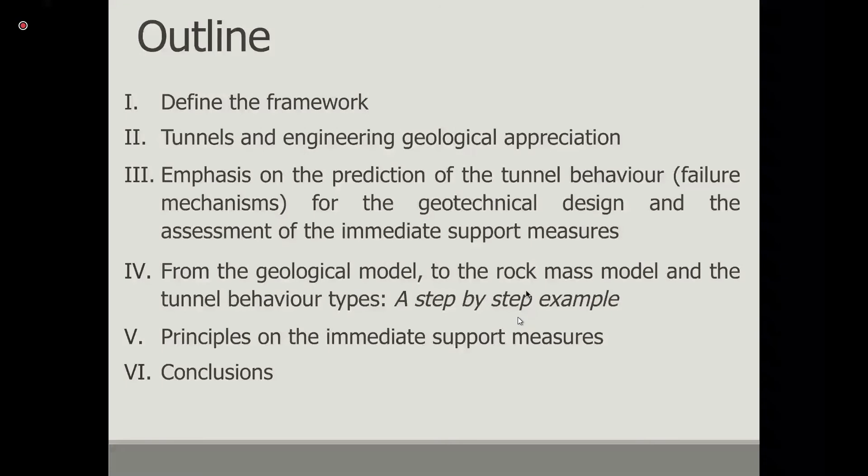So the framework of, in general, engineering geology, uncertainty, and tunnels would say that first of all we have to build a geological model, and the consideration to find all these particularities along the tunnel, all these geohazards that may come - either it is the lithotypes, or the tectonism, or the weathering, or the paleogeographic evolution - and all this should be constructed in an engineering geological model of the area.

So a lot of uncertainties may arise from that appreciation. In order to put that in the scale of your tunnel section, the identification of the ground mass types, either soil or rock, and specifying all the engineering geological characteristic keys that affect tunnel stability or instability. Then the assessment of the engineering geological behavior for every ground type when unsupported, before implementing any support categories, is another issue examined and analyzed here.

The selection and definition of the appropriate design parameters that the geotechnical engineer requires for his analysis is a particular assistance of the engineering geologist towards all these tunnel design efforts. And finally, the principles of excavation and immediate support measures based on these failure modes. I'm not talking about detailed support measures here, just the principles and types that the engineer should focus on in his analysis.

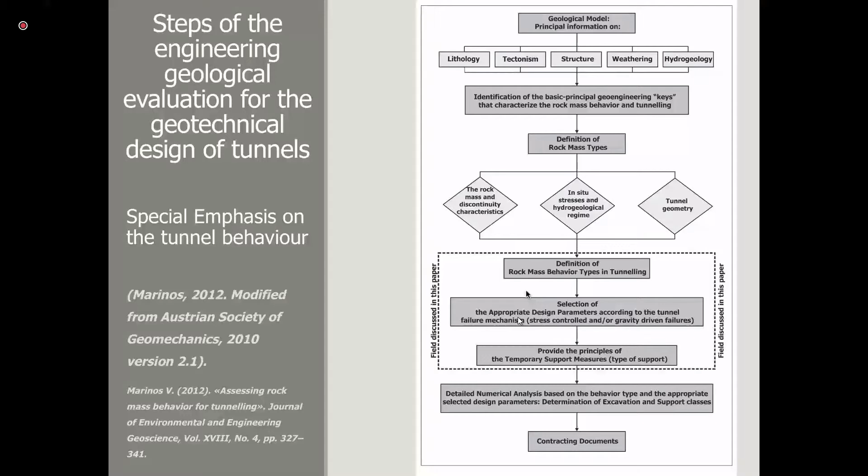But I have to emphasize here, what about the assessment of the tunnel behavior towards the geotechnical design? The simple question is how the ground works, and how this is implemented toward these steps. So I'd like to provide this flowchart to emphasize that the main link from the definition of the ground types to the selection of excavation and support categories is the definition of the rock mass or soil behavior types in tunneling. Let's see that in a bit more detail.

So from the geological model and the principal information from lithology, tectonism, structure, weathering, hydrogeology, any evolution that can affect the material's properties, whether intrinsic or structural, we have to identify the basic principal geoengineering keys that characterize the rock mass behavior in tunneling. Excuse me, I say rock mass behavior, but you can say ground behavior in general. My examples will just be given in ground types, in rock mass types - that's why I use rock mass types. But it's the same framework in general for soil types.

So we have to define the rock mass types along the tunnel, of course. And then, according to the rock mass and discontinuity characteristics, the in situ stresses, hydrogeological regime, and tunnel geometry, we can proceed to the definition of the rock mass behavior types in tunneling. And then we are on better ground in order to select the appropriate design parameters and give a more realistic analysis.

Either it's a stress-controlled or structurally controlled failure, then we provide the types of temporary support measures - the principles, not the detailed analysis that comes afterwards from the geotechnical engineering, but just the principles and types of support he should focus on in order to face that failure mode. And of course, then the contracting documents that follow.

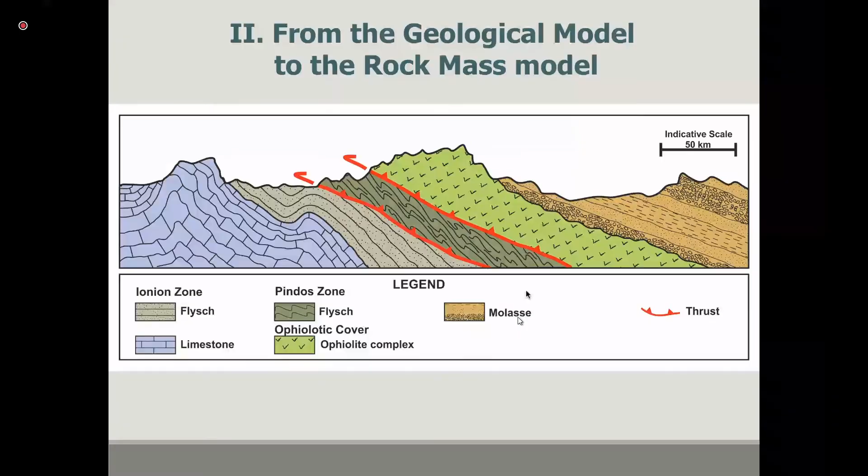So the first step is coming from all this. You can see the scale up there - we can never design at this large scale, but here we have to detect a point in our mountain and see what the structure is, if we have mixed conditions, what the tectonism is, what the weathering degree is, and all this. We try to put that in our mountain, in all the boundary conditions, and the in situ stresses or hydrogeological conditions we may have. So the definition of the rock mass types is the first step in this design.

This is, let's say, if we delay our design in tunneling to our final submission, what he may need during this time is he says, give me in a table the rock mass properties, the soil properties. Give me the section and the properties. This is the reality - this is what the geotechnical engineer wants.

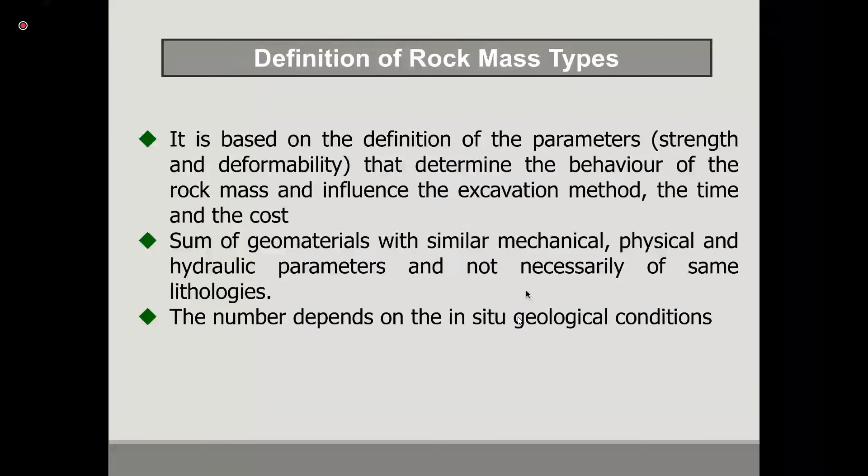Of course, this should not be the only information that we pass on to the geotechnical engineering. But let's categorize that first, and we will see how we can assist by not only providing this sum of properties. So the definition of rock mass types is a sum of geomaterials with similar mechanical, physical, and hydraulic parameters. The number of these depends on the in situ geological conditions.

And of course, to the excavation method also. Then we can group that we have to detect the properties of the intact rock and of the rock mass. So any strength and deformability parameters of the intact rock and of the rock mass are of higher importance. And the strength of the discontinuities and any other geometrical characteristics of the discontinuities are of great importance, depending on the behavior of the material.

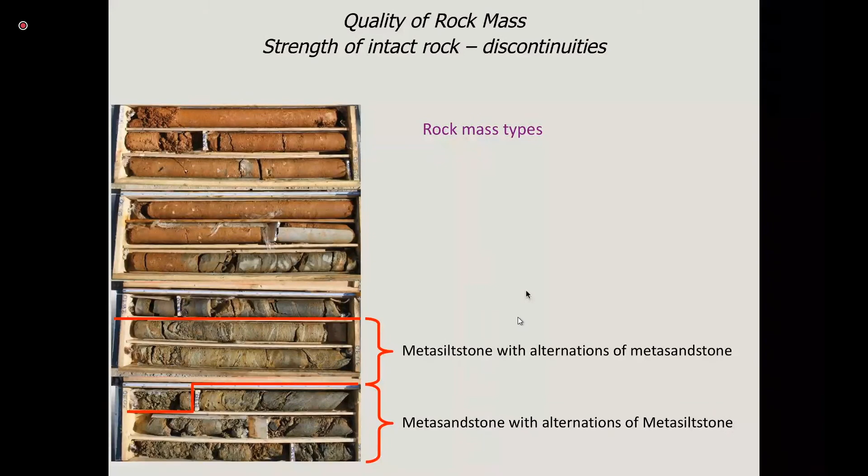Again, we have to distinguish which rock types we have, or which more particular units. So we can isolate meta-sandstone in one case, and alternations of meta-siltstone and meta-sandstone. Within these alternations, we see which one prevails or not. So we have to do this distinction in rock mass units, and then we can take different kinds of specimens or samples and try to test them.

And we have to use some common language between the geologists, engineering geologists, and the geotechnical engineers in order to describe these materials. And when this is a weak rock mass, here for example in alternations, this is a kind of flysch.

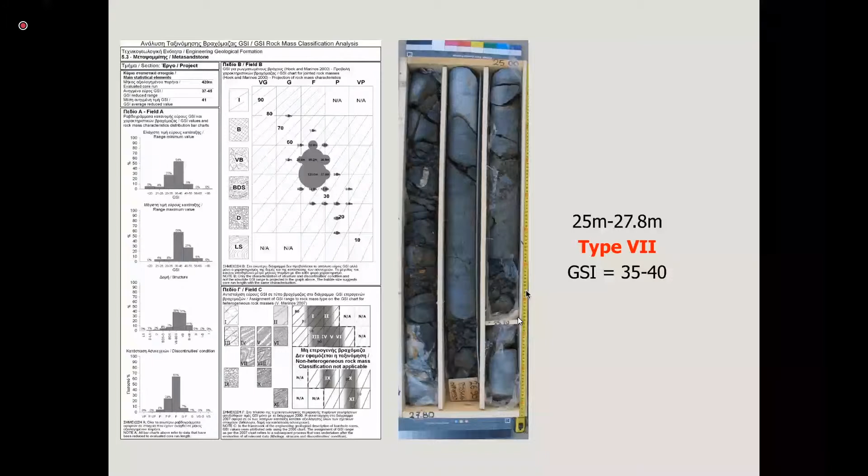They use the GSI for heterogeneous rock masses like flysch, and you see for hundreds of cores they do this kind of geotechnical classification. You see from the bubbles all these areas that you may have in your rock mass qualities. So here, immediately you can have a description of your rock mass, and you can quantify, put some numbers to the material, just to classify, just to characterize, in order to have a common language.

Together with the laboratory tests, if it's a uniaxial compressive strength, and information about the deformation modulus of the intact rock, also from point load tests, you can come up with correlations, and say that all laboratory and in situ tests correspond to one of the rock mass types and are evaluated according to their nature. And you can start translating this previous nice geological section into this.

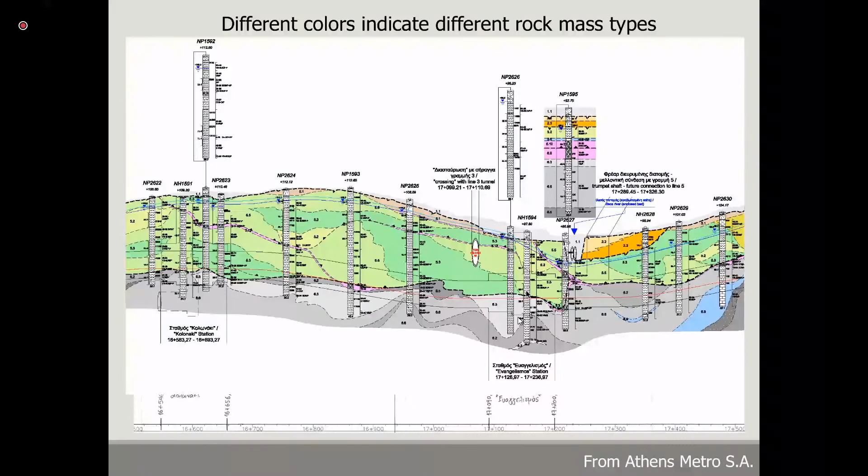And you can put some numbers to that, either it is a rock mass classification value or other properties of the intact rock. So this is an example of how you can identify rock mass types using the rock mass classification system and the laboratory tests. Another issue that we should be very, very careful about when identifying the rock mass types and then evaluating their behavior in tunneling is the scale.

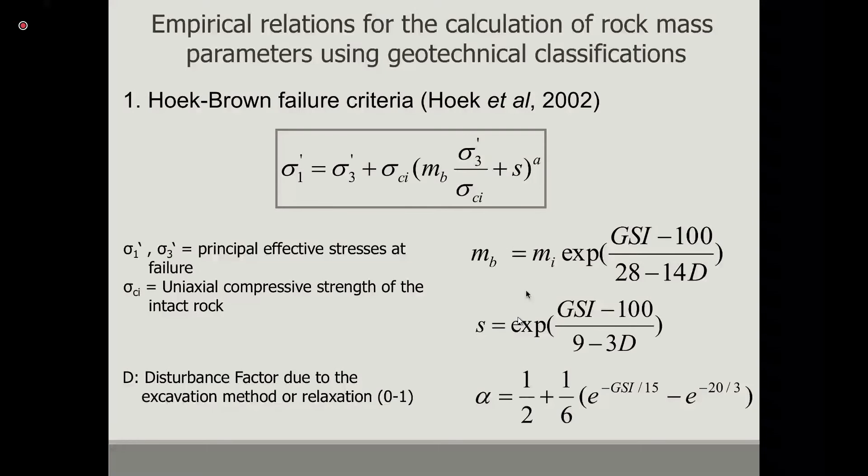Of course, again, I have to emphasize that this is for isotropic behavior. We know that as a very large description, isotropic and anisotropic behavior. So in this presentation, I want to highlight that, and not just depend on a rock mass classification system. But let's see that afterwards.

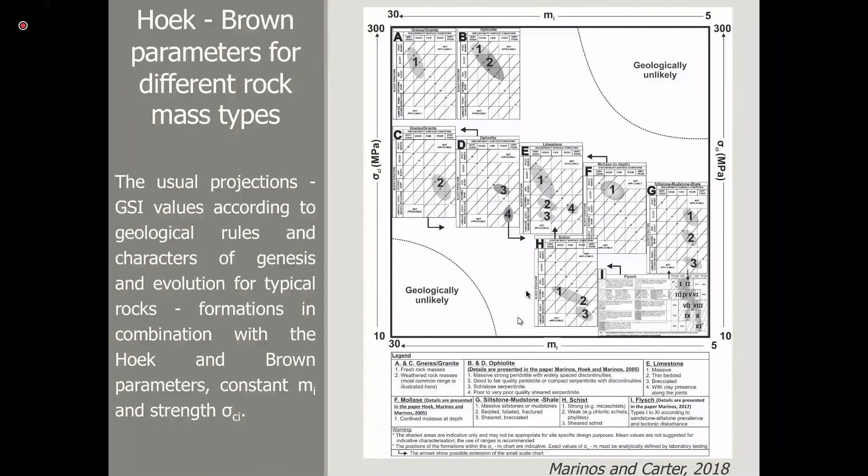So why select a property from a table from the literature for MI? You can see the ranges you may have, which can give you big ranges also in your results. So this is a very, very detailed job that should be done with triaxial tests for the calculation of MI, and for uniaxial compressive strength or point load for your materials, and of course the GSI that can come for the site-specific rock mass.

So in order to select a geotechnical classification system, you should be aware of the application ranges you have for when you use that.

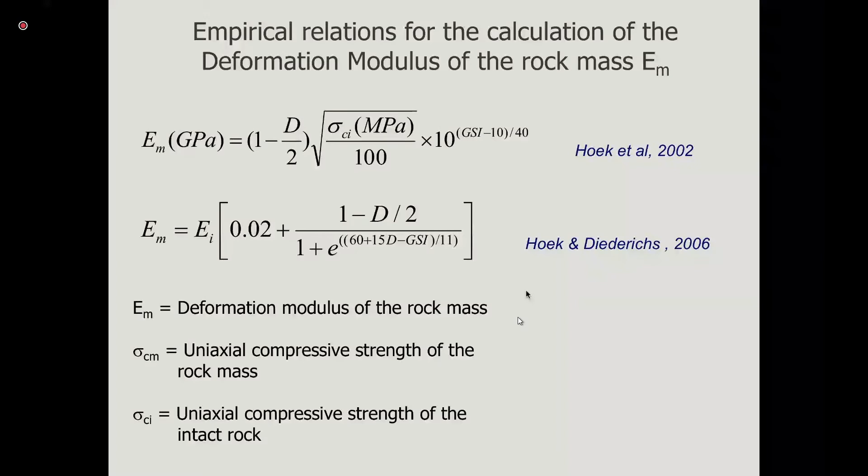Again, of course, other equations that you can use in order to calculate deformation modulus, because when you want numbers and you need to provide that for your rock mass, then you can use these correlations that may come from previous experience. And then again, it is your material—either it is the intact rock, like the deformation modulus of the intact rock, or the modulus ratio, or it is the uniaxial compressive strength of the intact rock, and of course the rock mass classification value.

So let's proceed to the main scope of this lecture: understanding the behavior in tunneling. And when I say understanding the behavior, I mean mainly the importance and how this should be incorporated in the geotechnical analysis. As Peter Vaughan said in his 34th Rankine lecture, the understanding of real behavior is more important than accurate calculation, and better prediction is only possible when reality is modeled.

And by Hoek and Londe in 1974, previously: the function of rock mechanics engineers is not to compute accurately, but to judge soundly. And when all your analysis is based on a more realistic modeling and the appreciation of how the ground works, then your job is founded on more sound ground.

So let me say here first, before proceeding, that of course we have different excavation methods, but here I will focus on the conventional tunneling methods, and that's where my examples are coming from. So I will focus on conventional tunneling, and here, let's say, 99% of our examples are coming from sequential excavation and top heading and bench method—not from full face excavation.

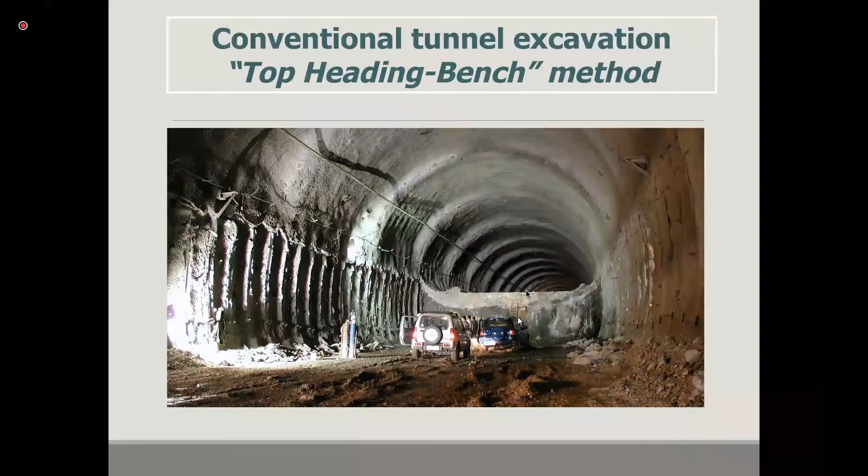And we're going to talk about all these measures we implement in such excavation methods, but it's not in the scope of this presentation to analyze that in detail, and I would say most of you know about all these. So when we decide what kind of measures we select, and the grade of the support we're going to use, and the type—again, this depends on the appreciation of the behavior before applying this.

I can show that by illustrating this example. Imagine you have two different rock mass types. The first, on your left, is a fractured rock mass with poor discontinuity surface conditions, let's say slickensided surfaces, under low tunnel cover. On the right, we have a brecciated rock mass with good discontinuity surface conditions, like rough surfaces, again under low tunnel cover.

So we have the same kind of material, let's say limestone, and the same in situ stress regime. When we use the GSI system and the observational chart, and it's the same if you use the quantified chart, we will see that the first rock on your left will be projected here in the diagonal of 40, by blocky and poor combination. On the right side, it will also be projected in the diagonal value of 40, though it is a very poor disintegrated rock mass with good rough surfaces.

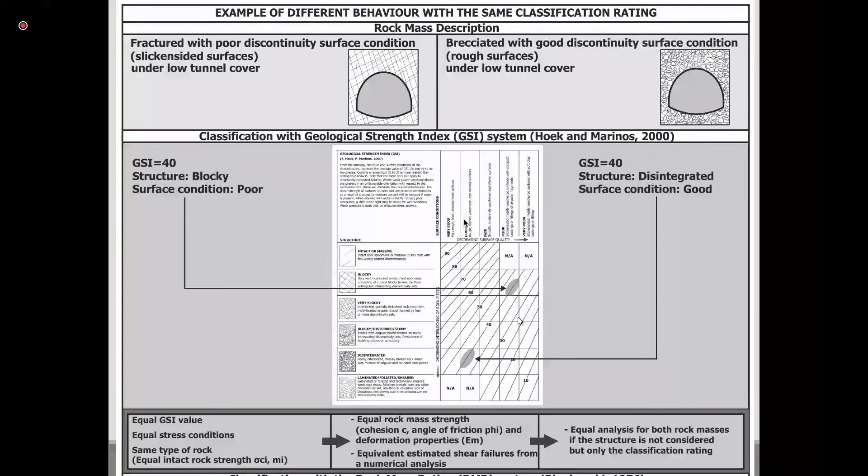If you go and calculate your properties by the Hoek and Brown failure criteria, you will find equal rock mass strength, cohesion and angle of friction, deformation properties, and equivalent estimated shear failures from a numerical analysis. So you will have equal analysis for both rock masses if the structure is not considered, only the classification rating. And if you do that for the RMR system, again, you will find yourself in the same support category, like here 3, for example. So you will get equal suggestions for support measures.

But the actual tunnel failure mechanism and appropriate support measures are totally different. On the left side, we will have wedge failure and block failure along the slickensided surfaces, and this will probably happen very fast because you have low friction along that. So you're thinking about a specific kind of supporting, like anchors, Swellex or Split Sets, in order to immediately support and confine these blocks that you can analyze in your tunnel design.

On the right side, you may have flowing ground or raveling ground, depending on groundwater presence. Here you probably need pre-support by light forepoling umbrella-like spiles, or a very small excavation step if you don't want to do that. You can see different kinds of appreciation in your support measures. And all these here are, of course, not detailed suggestions of support measures. Of course this experience comes from many tunnels, but I wanted to highlight the type of support and the philosophy after identifying the failure mechanism.

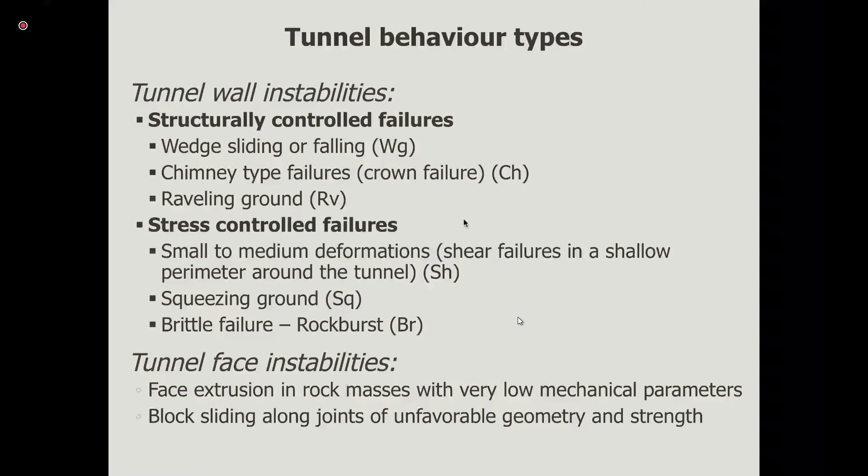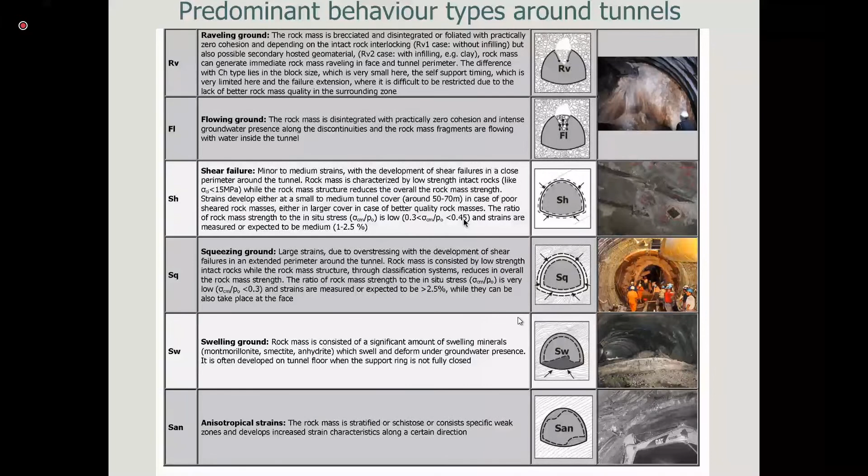I'm not going to stay here and make a theoretical example of that, but I will show some examples later in different rock masses - again, raveling, flowing ground, and then going to the shear failures around the perimeter, and of course some particular behaviors like swelling or some anisotropical strains around the tunnel. Again, I have to emphasize that these are some examples, some classification of the failure modes. In your site-specific tunnel, you should identify your failure modes in correlation with other examples in the literature.

So some pictures from raveling ground or wedge falling and sliding, and chimney type failure, and you see here in the material that has over-excavated and fallen. In this particular case, this is a completely weathered gneiss in depth along a fault zone, and of course the squeezing ground and overstressed steel sets.

You can see here how all these are yielded, and the very famous picture on the right side - you can see in a hydraulic tunnel how this has squeezed. And a first approach in order to say, let's say, when we start to have these stress control failures, is this chart coming from Hoek and Marinos 2000.

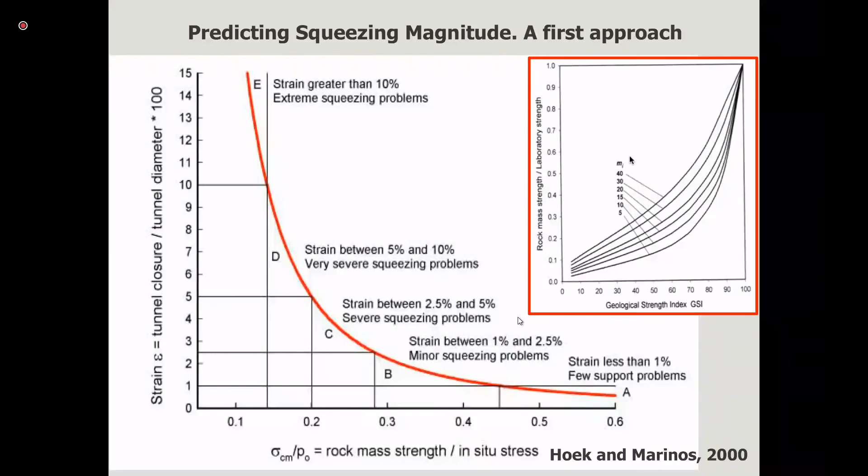From many cases, the appreciation and evaluation of the rock mass strength and the in situ stresses can give you the severity of squeezing. Different cases from around the globe, and all this monitoring coming from tunnels, gave us this chart. So we can have the calculation, a first approach. This is not a detail, just to say that in this section of our tunnel, we may face this kind of severity in our stress control problems.

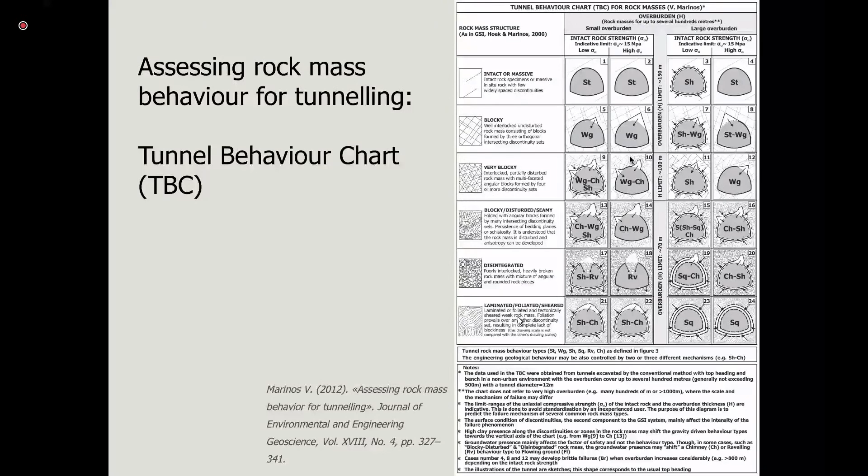From 62 tunnels, this experience coming from the design of 62 twin tunnels, I have to emphasize, we have the prediction of the tunnel behavior.

By identifying, let's say, parameters, the first one is the structure, and these are nice blocks, nice sketches from the well-known GSI chart. Then two sets of columns: small overburden on your left and large overburden on the right, and low uniaxial compressive strength on the left and high uniaxial compressive strength on the right. And the limits come low, high.

It is depicted here, and you can see that we are shifting either from a non-stress control problem to a stress control problem, which has to do with this ratio of the uniaxial compressive strength of the rock mass to the in situ stresses. So the combination of the GSI, the uniaxial compressive strength of the intact rock, and of course the overburden, can shift you from a non-stress control problem to a stress control problem. That's why you may see a wedge problem on the left, but then becoming a shear problem on your right, shear stresses control problems around your tunnel.

Another boundary for the gravity-driven problems has to do with the situation of confinement. When we are at depth, we have some confinement, so maybe some crown failures, or some raveling ground close to the surface where we don't have a lot of confinement, we may not have it at depth. When we get raveling ground, as in situation 18, we may not have that at depth after, let's say, 70 meters, and we may have chimney type failures. And of course, we may have some initiation of stress control failures. I'm not going to say more on this chart because we're going to use it in our examples later.

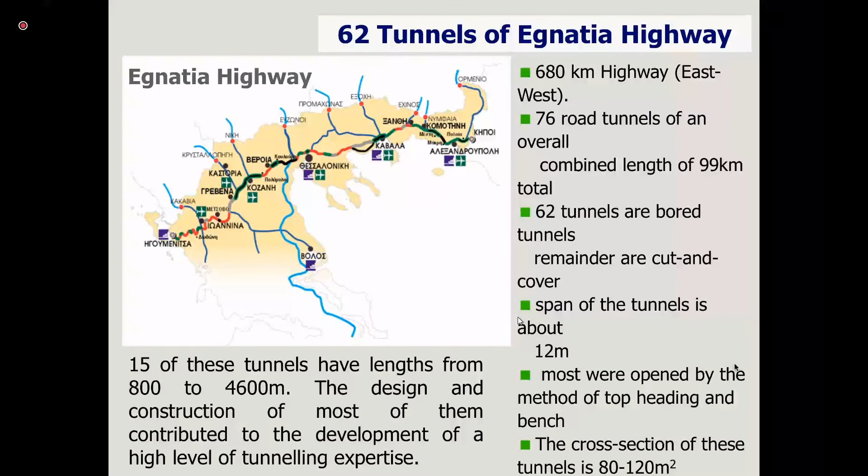You can see that all these 62 tunnels are bore tunnels, and more are cut and cover tunnels, many of them in a mountain environment. You may have Greece in your mind as a country with a lot of sea, and that's particularly true, but we have a lot of mountains, and our alpine chains are very challenging.

This is a road coming from Roman times called Via Egnatia, and part of the project ran along this old ancient road. What is particularly important here, and we were very lucky when we had to construct these tunnels, is that you can see the geology of Greece with its main geotectonic units running from north to south. So we cut almost all of them perpendicularly.

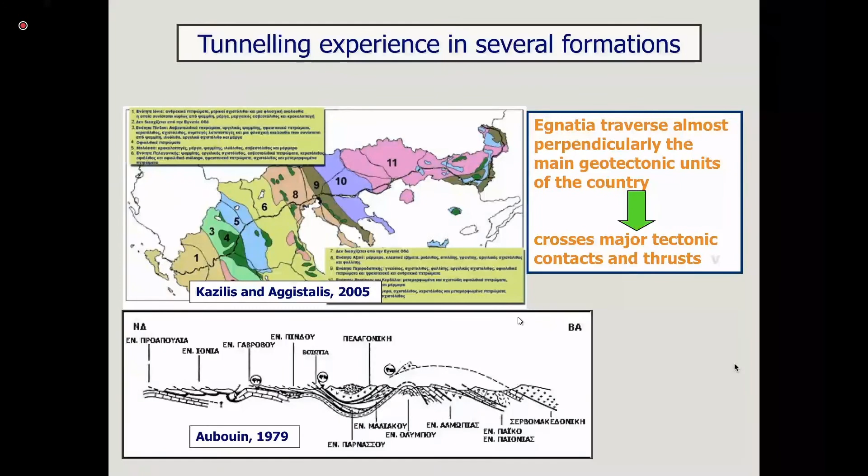In this case, we had a lot of information about Flysch formations, molasse deposits, crystalline rocks, weak schists, many rock masses.

All this information was incorporated and analyzed in a database, a tunnel information analysis system that manages and correlates all the site investigation, all the parameters, all the excavation and support categories, all the analysis, and of course the construction records and the cost of these tunnels.

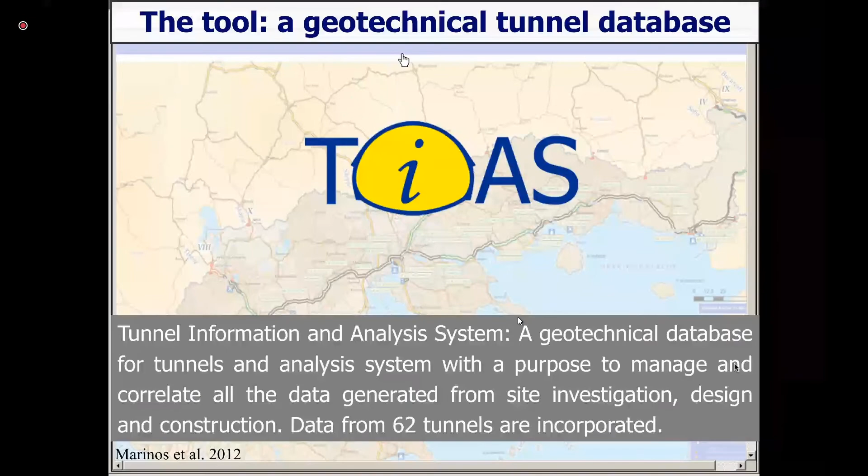A lot of information coming from many tables was afterwards correlated, and you can see here the structure of this database, which was based also on the AGS database of the Association of Geotechnical Specialists.

So let's go to our examples. Our first example comes from limestone. This is a straightforward material, of course—not a lot of challenges in limestones, only when karstified or heavily brecciated.

I want to highlight here how they stand. They have very good frictional strength, this material, but very low cohesion. So in open cuts, they may have a very good stability. Of course, they have some cementation and cohesion also, not only frictional strength. This can stand. But depending on this interlocking, we may have some raveling ground within the tunnel.

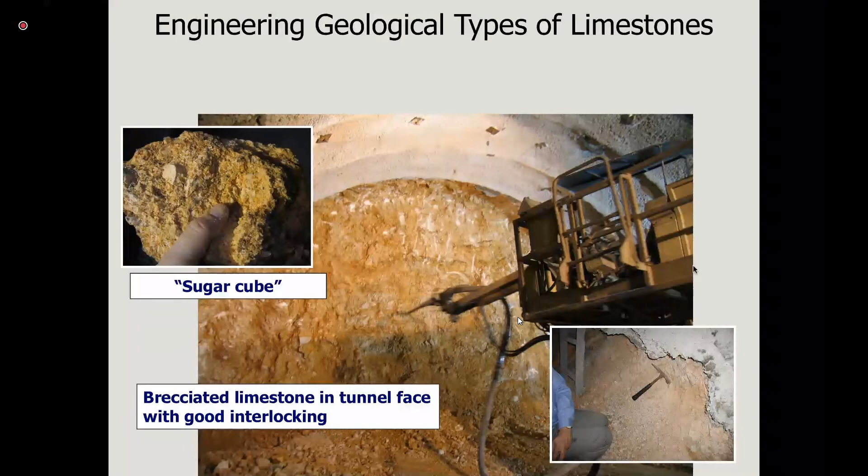So let's see the different kinds of rock mass types we may find in this environment. Of course, we may have this simple bedded material, moderately disturbed, and we expect some wedge failures here. So if you see the blocky material under small overburden, which here is under 150 meters, and high uniaxial compressive strength, we have a projection of wedge failure. And of course, for an experienced tunnel engineer, this is straightforward.

When we have a heavily folded formation of limestone here, you can see this is projected. This geological chart comes from limestones and alternations of limestones with other material that can occur in these alpine chains. So here we have a folded, highly disturbed, thin-bedded limestone with angular blocks formed by many intersecting discontinuity sets. In this case, we may have some crown failures, chimney-type failures, and of course, some smaller wedge failures. We don't expect large wedge failures, though, because changing the scale, depending on the scale of our tunnel relative to this folding, gives you different scaling in your wedges.

Another case is this brecciated rock mass. In this case, depending on whether there is clay infilling or not, you may have some severe raveling ground. So you see that here we have a disintegrated structure, again under small overburden, with an overburden limit of 70 meters. We have raveling ground, and in this case you may also experience some settlement when you use a heavy forepole umbrella to deal with that. So you need to incorporate that, and not put something heavy just to face this, but use some pre-excavation measures like light spiling.

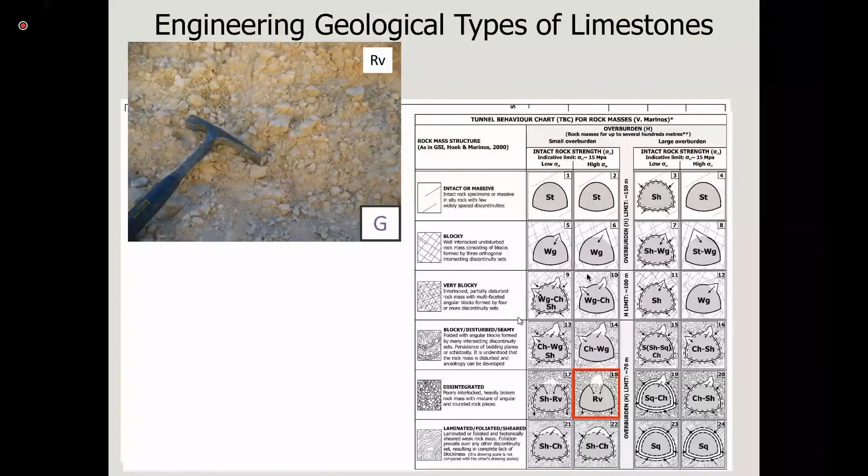So you see here some photos of this raveling ground, and of course at the portals you may face type G, the heavily broken, disintegrated limestone with high clay presence. Here you may have some immediate dead load in your tunnel.

So let's proceed to the Flysch example. If you don't know about Flysch, Flysch is not a rock, it's a formation, composed of rhythmic alternations of sandstone and pelitic layers. You may also have some conglomerates, and it's associated with orogenesis, with mountain building, and it ends the cycle of sedimentation of a basin before the paroxysmal folding process.

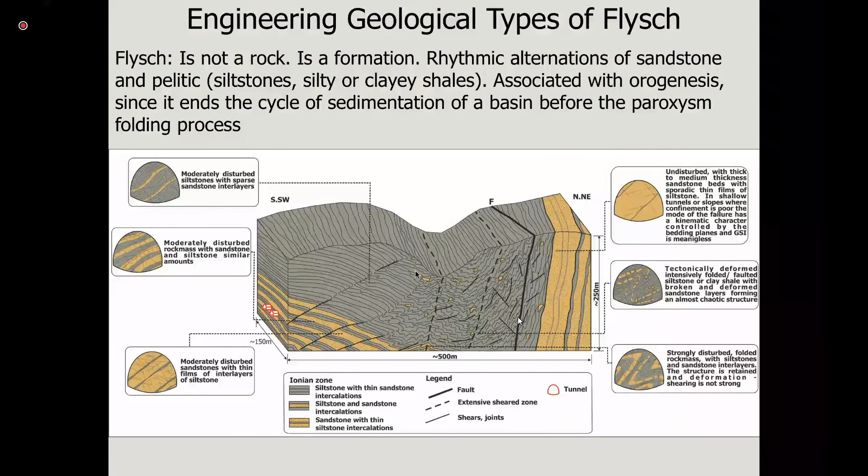And you can see also the folding, or whether it's not very highly stratified. So in this case, we may have all these six different kinds of rock mass types in this fraction of our tunnel, depending on what prevails and how heterogeneous this material is, and how tectonized it is, depending on the history coming mainly from the tectonism of this material. So our ground types here are complex because we have these alternations of competent and incompetent members.

Tectonic disturbance also transforms the initial structure and can produce tectonic mixtures. On the other hand, we have weak rock masses because of the presence of clay formations, and we have degradation due to shearing and fissuring. So degradation comes not only to the structure but also to the intact rock scale.

Close to the surface, we may have severe weathering of the silty clay members due to slaking processes. These materials are highly susceptible to slaking. And of course, groundwater comes and downgrades the quality of the silty clay members and can produce high water pressures. All these units are highly impermeable.

Though you may have sandstone layers, due to the interlayers of very impermeable claystones or siltstones, it reduces rapidly in permeability. This comes from the experience of many in situ permeability tests from boreholes within this material. So let's see this example.

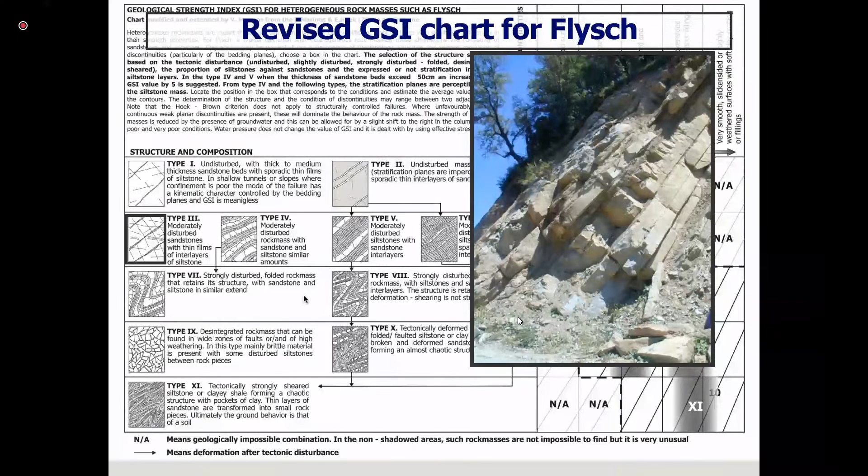So just to screen some photos here of sandstones and siltstones. Whatever prevails in the top lines, you have undisturbed rock masses. You can see these are certainly 11 rock mass types in Flysch, many types that can change from face to face within your tunnel. Type 3, moderately disturbed sandstones with thin films or interlayers of siltstones, and then the percentage changes, not the tectonic disturbance, but just what prevails.

And then we go lower, to the lower floor, when we have folded structures. Here, sandstone and siltstone interlayers in similar extents, but here the siltstone prevails again, while the tectonic intensity is the same. And we go to brecciated rock mass. In order to have a brecciated rock mass, you need a brittle material here, and in order to have a brittle material in the Flysch, you need mainly sandstones or strong conglomerates or metasiltstones, which have a higher strength.

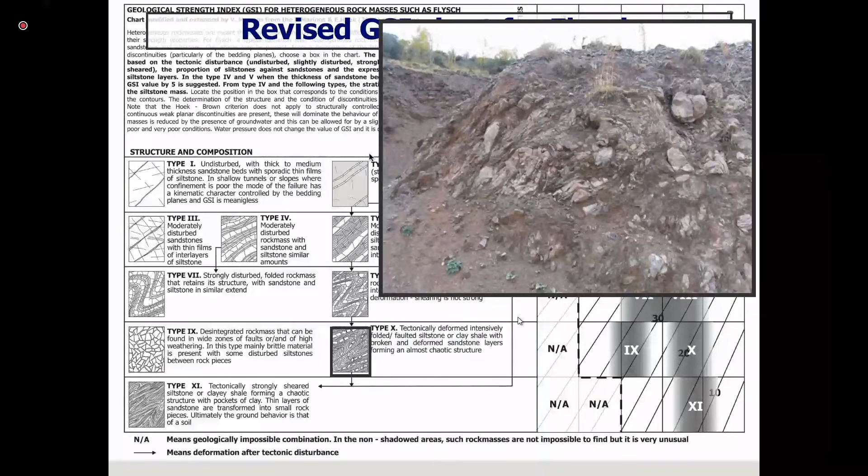And the tectonically deformed, intensively folded siltstone forms an almost chaotic structure. You can see here how the sandstone, let's say, tries to follow this plastic deformation, and here the blockiness is lost. We have a foliated structure, siltstone or clay shale formations with pockets of clays. Again, use it only for isotropic rock mass behavior.

And of course, we can then get some numbers and quantify all this for the Flysch type: the GSI, the uniaxial compressive strength, the constant mi of Hoek-Brown, the deformation modulus of the intact rock, and then obtain from RocData, from the Rocscience programs, the equivalent properties.

It is extremely difficult to take a sample of intact rock that's a representative specimen of a rock. For very weak rock masses, we have big uncertainty in the materials, and the knowledge comes from back analysis of other projects with similar materials, because it's very difficult to prepare laboratory specimens for this kind of material.

So I'm running out of time.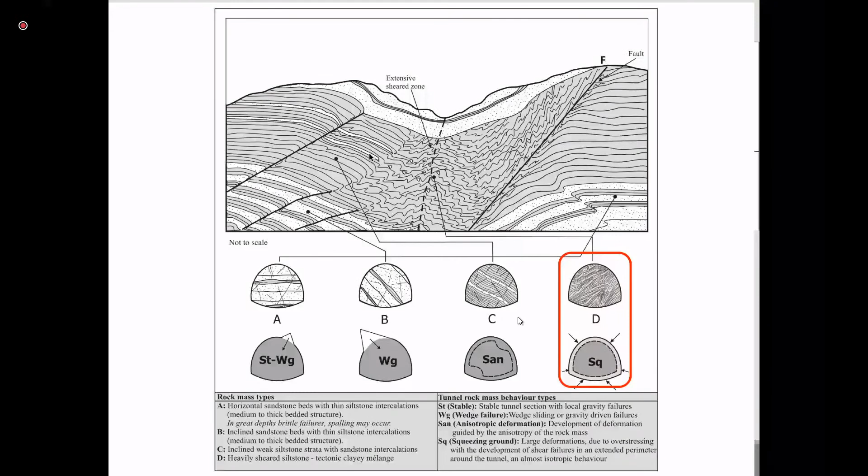When we have severe squeezing ground and a chaotic structure, we may experience overall squeezing conditions around the tunnel—not anisotropical deformation, but large deformation due to overstressing, with shear failures developing in an extended perimeter around the tunnel.

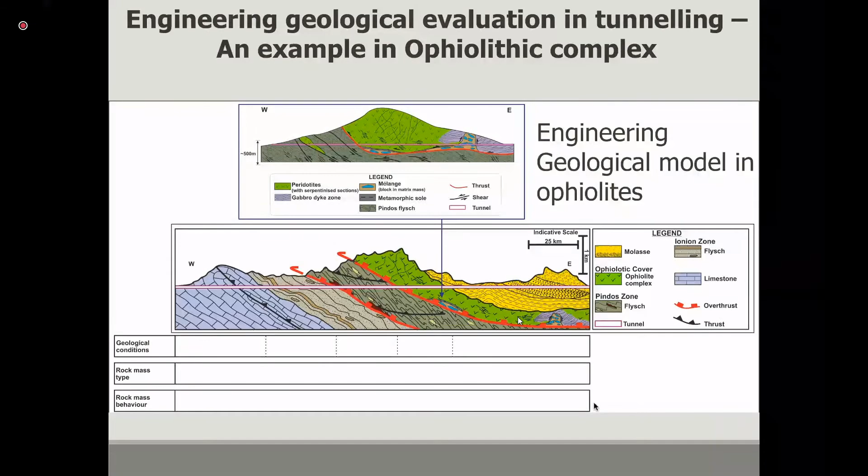I had an example of ophiolites here. I won't dwell on it since we don't have much time, but I wanted to emphasize that the uncertainty from this material is totally different. It's the environment that generates it, but also the thrustic, tectonic thrust connected with these ophiolitic complexes, and also the serpentinization that can occur anywhere within the tunnel.

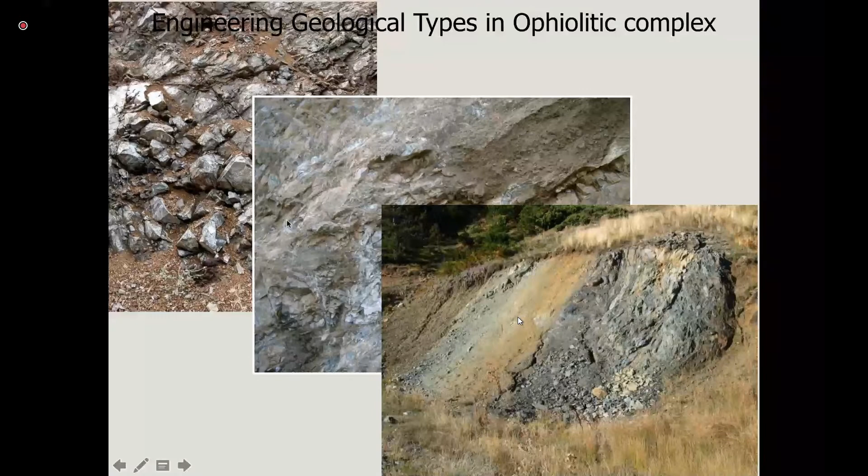It's not just a surface weathering problem—it can happen during crystallization of the magma, so we can find it anywhere within the tunnel, not just on the surface. You can see the uncertainty: we may shift from blocky rock mass to heavily serpentinized rock mass to highly sheared foliated rock mass. These are complex, weak rock masses—from massive peridotites with no serpentinization and very high uniaxial compressive strength, to rock with very high uniaxial compressive strength but reduced strength along shear surfaces and joints due to serpentinization.

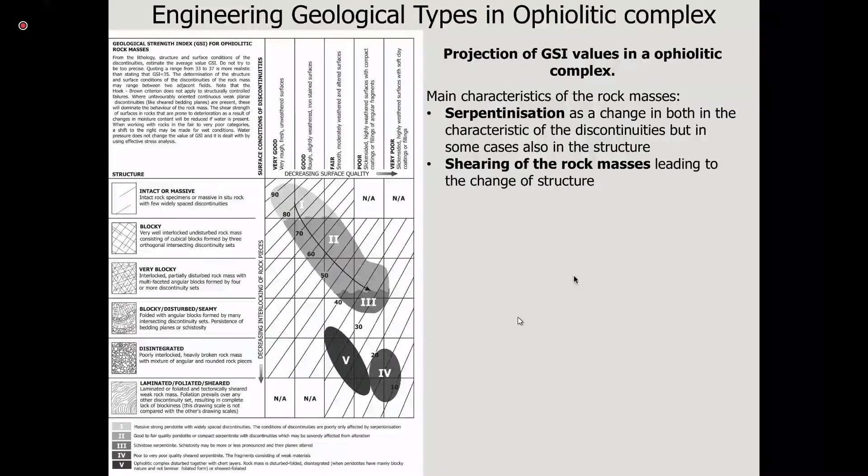Also, due to the intensity of serpentinization, you may have reduced uniaxial compressive strength and MI parameters, and the structure is influenced too. We can see this nicely in the chart—the arrow shows serpentinization intensity and how it influences structure, shifting from quality 1 to quality 2 and 3, ending in heavily sheared brecciated rock mass due to serpentinization. This gives structurally controlled failure, or at very large depths, brittle failures—though we didn't encounter brittle failures in our tunnels. Crown failures occur where serpentinization is intense, and when it's heavily sheared and foliated serpentinite, we get squeezing ground.

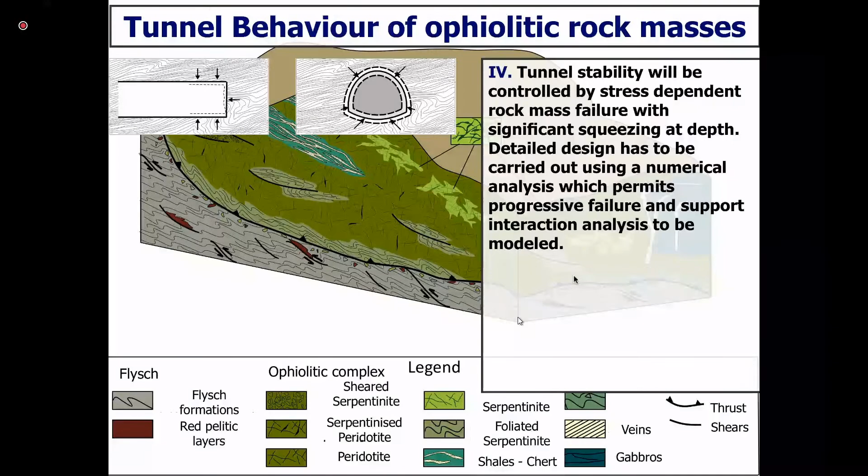In molassic ground, we may have an environment similar to Flysch in alternation. The post-orogenetic nature of this environment gives it a totally different appreciation. So yes, we have heterogeneity, but only on the surface, with heterogeneous and heavily weathered rock masses due to slaking processes. But at depth, all these materials are continuous, irrespective of what prevails at surface, because all these joints are sealed within the rock mass.

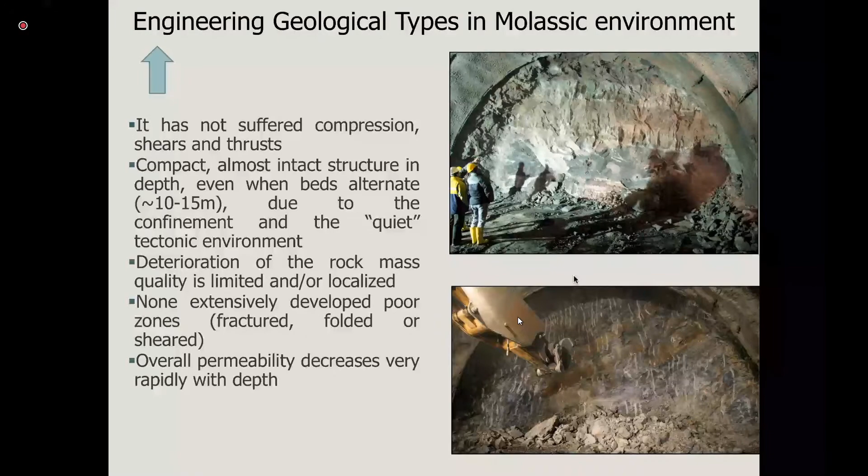These rock masses are not folded, not sheared by reverse folds. That's why we have very good rock masses in this tunnel.

The only thing you have to be careful of is weathering at your portals, where your material, the same course here on the left and on the right, can collapse due to slaking after some months. You can see this in this picture.

So with very high geostress, depending on the uniaxial compressive strength, we may have structurally controlled failure, or in-depth shear stress controlled failures due to the presence of siltstone.

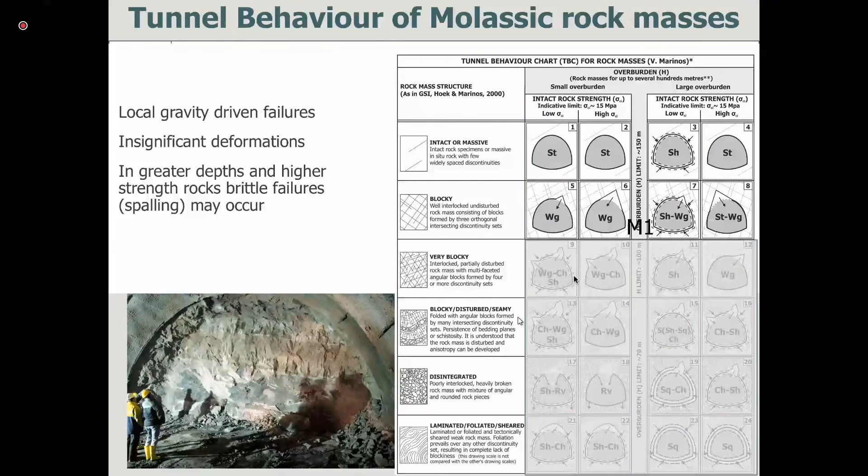So here in depth, we expect structurally controlled failure or stable tunnel sections. And when we are close to portals or close to faults, we may have chimney type failures.

But close to the portals, we had some severe failures, circular failures due to this weathering, where we have siltstones highly weathered with very low uniaxial compressive strength, because the material is very recent, so the diagenesis is very low.

A very good job you can find in the proceedings of WTC 2020. These are sections highlighted in these different kinds of formations, and you can find the step-by-step procedure.

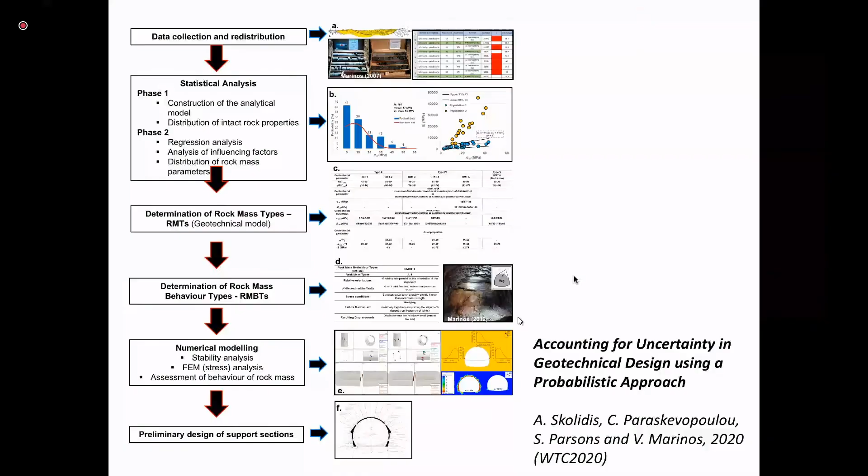Of course, the principle of our support measures is to control, to keep confinement, and restrict the relaxation, the disorganization of the rock mass. So retaining the discrete and unstable blocks is our focus here, and the wedge analysis moves forward.

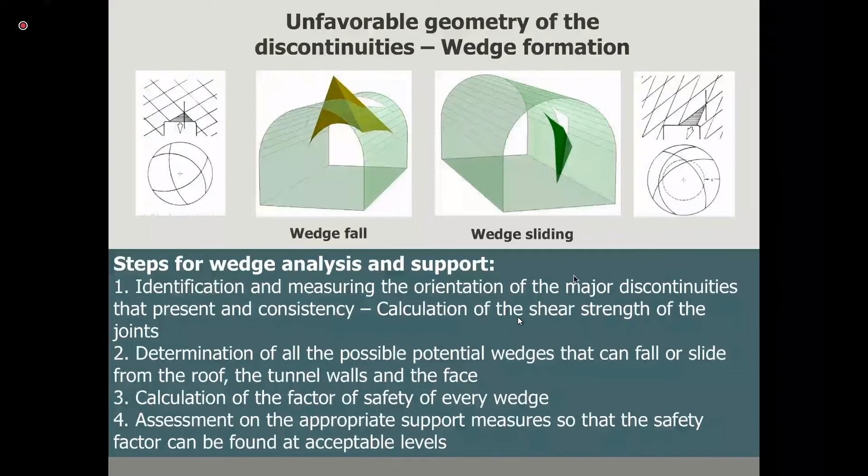This mainly has to do with scaling these wedges and finding the shear properties of the joints in order to calculate the factor of safety along your tunnel. So any certainty comes only if we scale, if we put the reality of the aperture, of spacing, of the consistency of the rock masses, of the discontinuity sets.

So we calculate, we find our wedges, and then we have to find, either by shear strength tests of natural joints, or if we cannot do that, we can use the Barton and Bandis and other more recent equations in order to calculate the shear strength properties of the joints.

And here we can use the Schmidt hammer and the profilometer in order to assess the shear strength properties. Of course, then we can evaluate the factor of safety around the tunnel. Again, be careful to model the reality and scale the wedges.

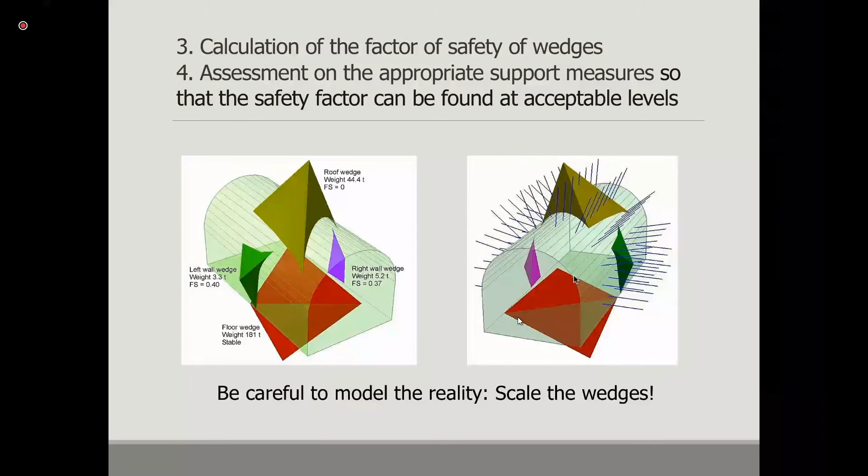When we have a very straightforward wedge problem, then our support is mainly given by anchors. The excavation step can be done so as not to disturb and not to create any large wedges. So the rock bolt pattern strengthens the rock mass and keeps it confined, preventing possible gravity-driven, structurally controlled failures.

When we have portal areas, low overburden areas, and fault zones, apart from the application of the shotcrete and bolts, we may have to put pre-support and spiling, or use a smaller excavation step in order to keep confinement and control wider gravity-driven failures.

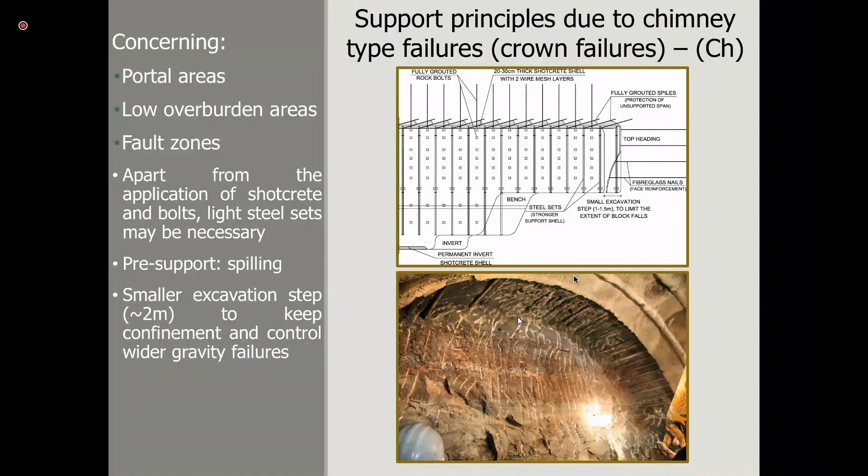So we don't have to use heavy forepoles, just some pre-support elements of spiling.

And here you can see, in ground of limestones, heavily brecciated limestones, grouted spiles were used. You can see some concept of them that was applied in order to face these instabilities.

And finally, when we have squeezing ground, we can choose either a rigid or a yielding philosophy in our tunnel. I'm not going to focus here, just to provide the focus depending on the failure mode. You can see here heavy support or yielding over-excavation.

Gaps in shotcrete and sliding steel sets can be used here if we have this kind of section in our tunnel. A typical support design for weak rock masses that was used in the Egnatia highways, you can see in this section. This is very generalized, but changing with different kinds of ribs, different kinds of forepoles or fiberglass, and of course temporary inverts were used in order to face these face control problems in the squeezing ground.

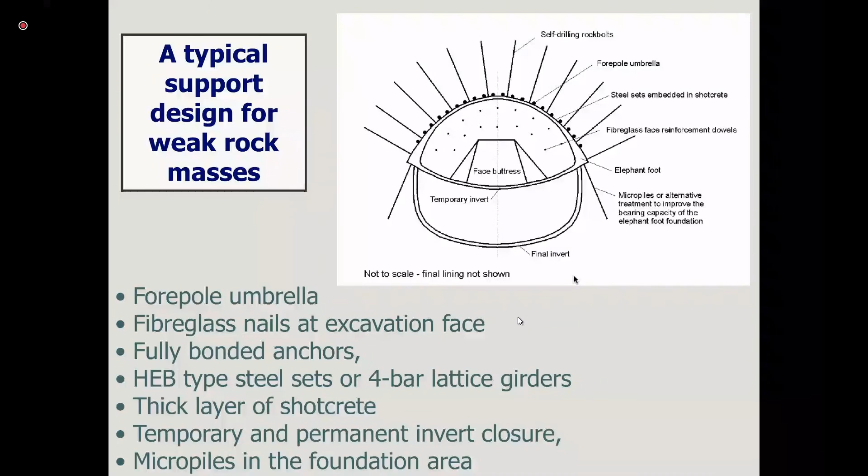So, ending my presentation, in order to go from the ground model to the ground behavior and support principles, you see here that in between the link is a ground behavior assessment. In these columns we have our ground types, and we can assess all the key parameters. We can define either it is a rock mass or intact rock, or the discontinuity properties.

Then we can assign different behavior types along our tunnels, and which kind of ground types, in which kind of combinations of these ground types, may have these behavior types should be assigned here in this kind of tables. Giving here the particularities, for example, what is the orientation of the main joint set? Does it play any role? The primary stress conditions, the groundwater, and then provide the rock mass behavior, not by just saying WG or CH, not by abbreviation, but for your site-specific problem.

And then your radial displacement or your face stability, if you encounter it or not. Then you can combine your rock mass with the behavior type and the support category type, and you can then proceed to the analysis, either it is a numerical analysis, finite element analysis, or Unwedge analysis.

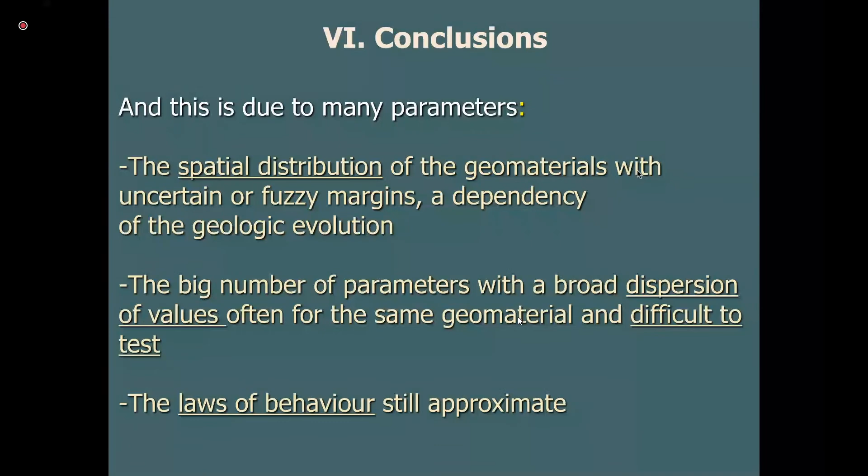The spatial distribution of the geomaterials with uncertain or fuzzy margins, a dependency of the geological evolution, a big number of parameters with a broad dispersion of values, often for the same geomaterial, and difficult to test sometimes. And the laws of behavior are sometimes still approximate.

So the emphasis on the prediction of the tunnel behavior here and incorporation into the geotechnical designs, and the assessment of the immediate support measures, can reduce the uncertainty for the selection of the appropriate geotechnical analysis, based on a more realistic geological model and failure mode, and the selection of more suitable geotechnical parameters for any analysis. We can then narrow down any types of support measures designed to control the evaluated failure mode.

It is then obvious why the geological judgment for the understanding of the behavior must always be present, and why it is so important.

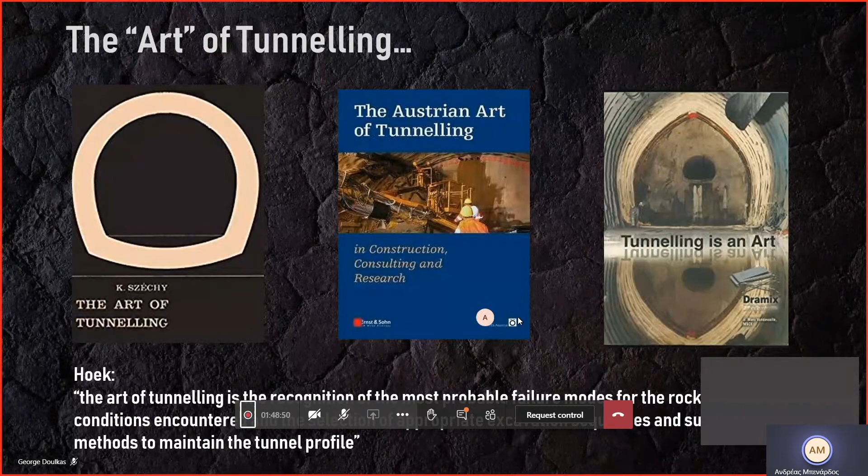Thus, it is not far from being an art, and in these books you can see this further strengthened, where the definition of the art of tunneling is given as the recognition of the most probable failure modes for the rock conditions and the selection of the appropriate excavation sequence and support methods to maintain the tunnel profile. The rock conditions are the ones we should focus on to find the most compatible and cost-effective designs.

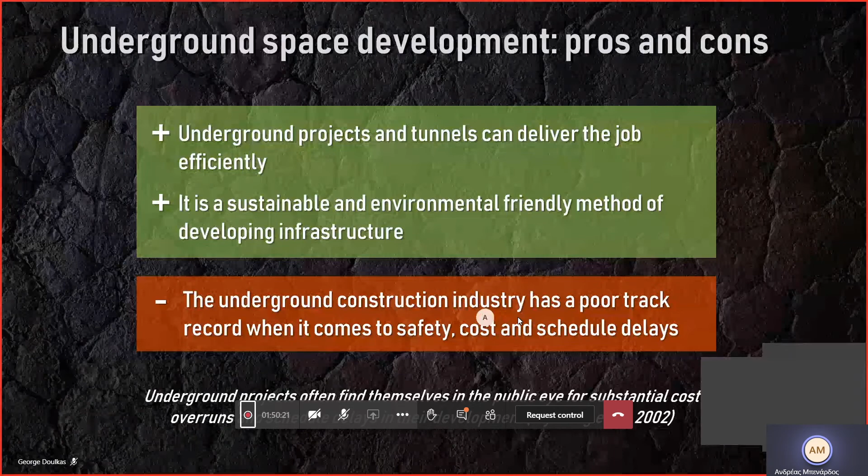Underground space development provides an extraordinary opportunity to get the job done efficiently and, more importantly, with great environmental sensitivity. This can counterbalance the fact that underground projects are generally more expensive in capital expenditure than respective surface installations. However, it is widely accepted that there is always the risk of great overruns in cost and scheduling delays. This element still exists, even though great efforts are made to minimize these mishaps.

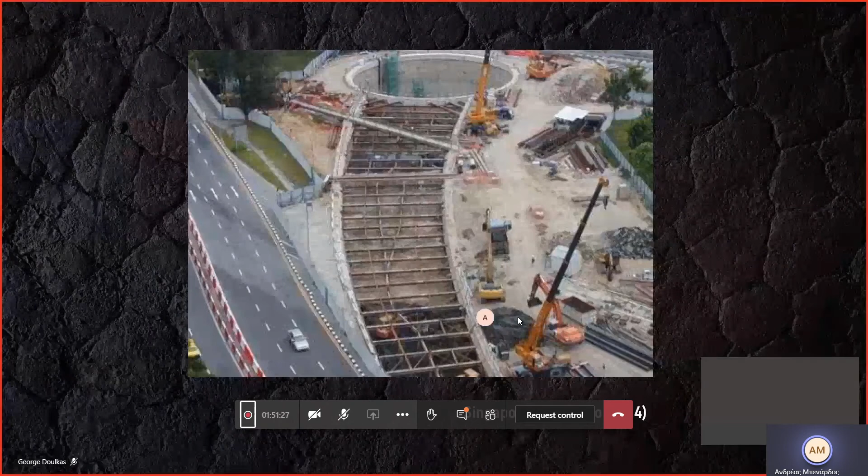Once again, from Singapore, this is the MRT line, and in this incident, this is called the Nicoll Highway collapse. You can see again the consequence in the near field. Next is from the Cologne Metro, and you can see some devastating pictures. And the last one, the most recent one, is from China, in Xiamen Metro in 2019, and you can see also the surface effect of this collapse.

The previous images can give an idea of the magnitude of the problems. The Hong Kong Civil Engineering and Development Department has actually issued a very interesting publication called Catalogue of Notable Tunnel Failures and Case Histories, where some details and mechanisms of major tunnel collapses are presented.

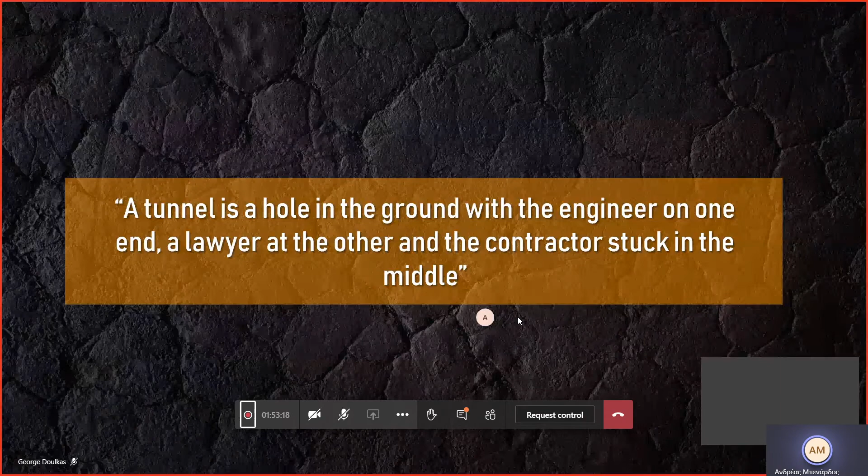Besides this theoretical framework of uncertainty, I try to be more practical and include the reasons for having uncertainty. These include the variability of property values due to inherent randomness of the ground medium, statistical variation of measurements, subjective judgment disagreement - for example, what is the GSI and RMR value - some linguistic imprecisions, for example whether the rock mass is good or bad, or approximation errors that arise from using simple or oversimplistic models to assess the behavior of complex systems, such as those governing ground response to excavation.

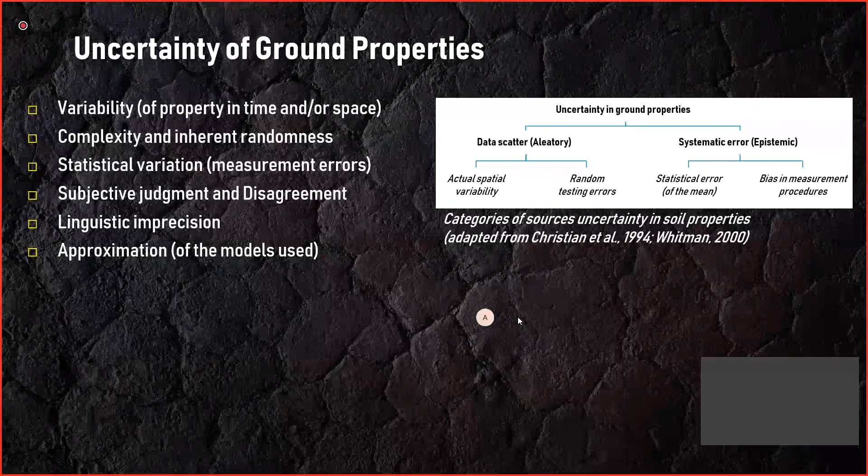The real issue is that we are sometimes unable to accurately define ground conditions, as unlike any other engineering material, we don't have exact or accurate values that can characterize it. More importantly, even if we manage to get some values, we're not actually certain if these are representative of the entire volume of the ground medium.

All of this gives rise to clauses like differing or unforeseen ground conditions that can yield claims and disputes between the involved parties. And even if newer types of contractual conditions exist, for example the geotechnical baseline report, uncertainty still dictates a great extent of the evolution of the underground project.

So the question that really arises is: how to take decisions under uncertainty, and how certain or uncertain are we about the prevailing uncertainty level of the ground conditions.

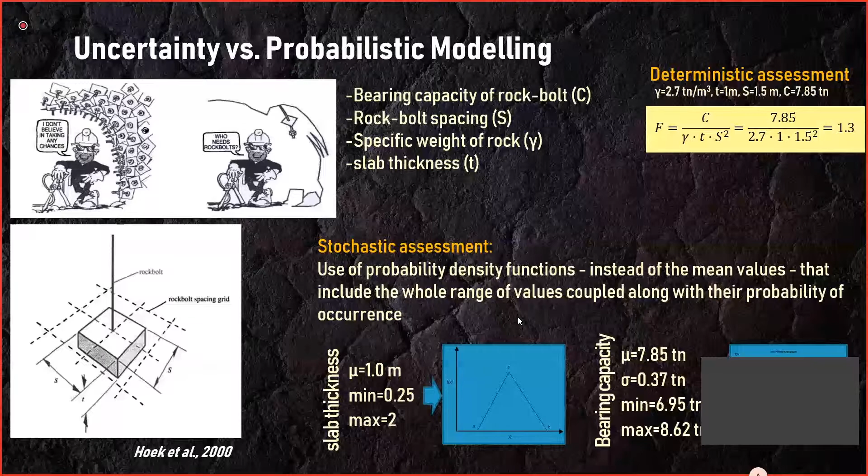So with no further delay, let's pass on to this assessment, in which you can see the modeling being made by the Monte Carlo simulation. We are running this simulation for around 1,000 iterations, and each new iteration depicts the realization of a probable scenario. The more the better, and as we progress, we find that we are getting results of a safety factor.

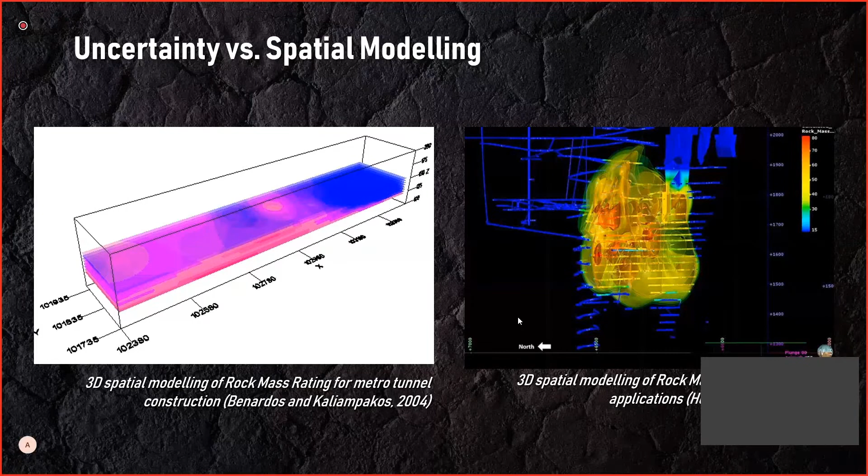The first case I'm going to present deals with this spatial analysis. It's from Greece and is related to the ground conditions encountered during construction of the Lavrion Technological and Cultural Park and underground hazardous waste at the site. This is part of the remediation activities that took place there, and it was decided, instead of having the waste packed and shipped to a German underground repository, to build our own repository on the site.

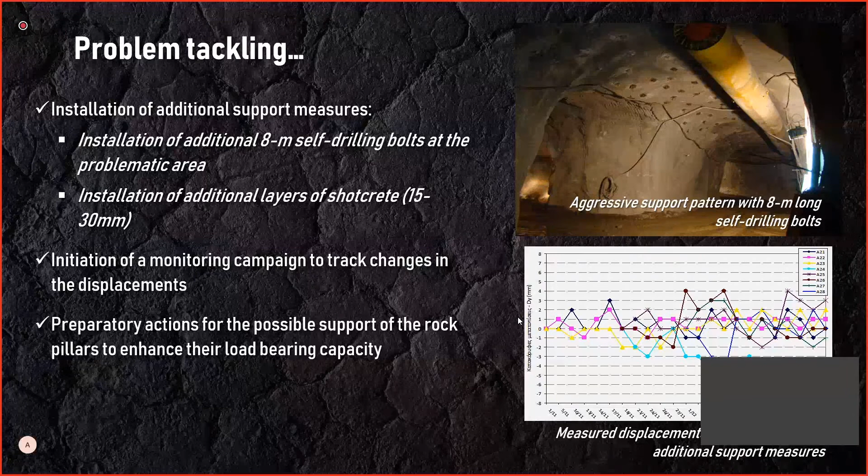However, it was stunning for us to see that with these 30-meter boreholes and all this investigation, we weren't able to pick up what was going on underground. So we tried to make an assessment of whether we could pinpoint this anomaly from the early stage of the initial investigation campaign using the actual initial borehole data.

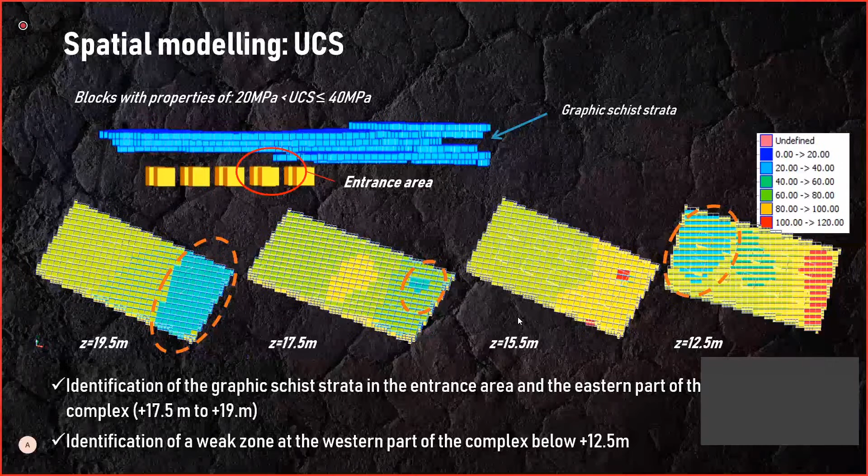Here we have 4 sections, also focusing in this area. You can see that sections 1 and 2 reveal a low strength area, approximately from the levels above 16 meters, and also a low strength area at the western part of the complex below the level of 12 meters.

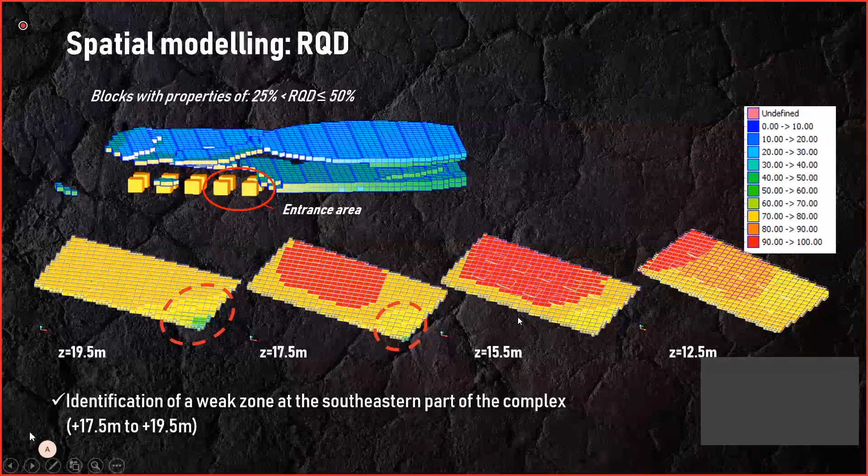There is some modeling from the RQD values, and the results tell us more or less the same thing. The most intense fracturing is found in the area of the eastern border of the facility, especially at its southeastern corner. Also, it was found that in the eastern part of the roof section, the RQD values are

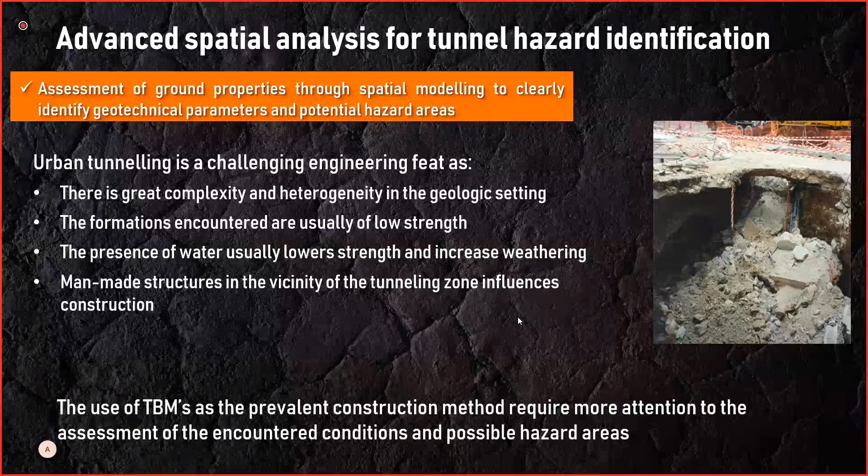However, if we don't have sufficient data, then the uncertainty level of the interpolation can be very, very difficult to achieve. So in this situation, we must resort to a more complex type of analysis and use correlation between known data and unknown data so as to establish some guidance of what to expect.

Going to present you the case of Athens Metro, and in this case we're going to deal with the analysis of an interchange in the Katehaki-Panormou section. It was part of line 3 of the Athens Metro construction, and is actually one of the largest interchanges, with almost 1.1 kilometers in length.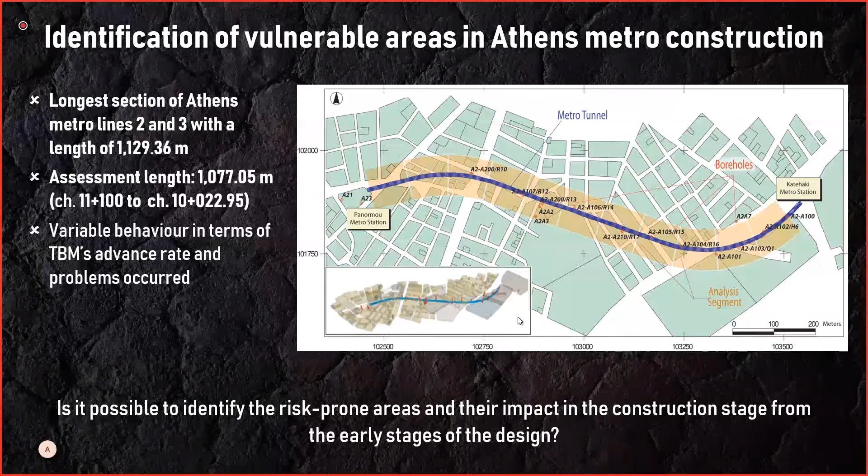In general, the problems in the construction of the Athens Metro, apart from the man-made structures, were the heterogeneity and the reduced strength of the geological formation, the extensive fracturing, and of course the weathering. All of the above created some major problems related to face instabilities, surface settlements, and water inflows that made it very difficult for the TBM to pass through.

Each one of them actually corresponds to a behavior type that can affect tunneling. For example, the most important parameter for designing the TBM is the UCS. And of course, the RMR classification used to describe the stand-up time of the excavation, or the overload factor, can assess face stability.

On the other hand, the selected method of tunneling has its own qualities, characteristics and needs. The thinking is that once we establish an assessment of the compatibility between the construction method and the actual geotechnical setting, we can then easily obtain data on how well we can know if we have a good situation for tunneling or a bad one.

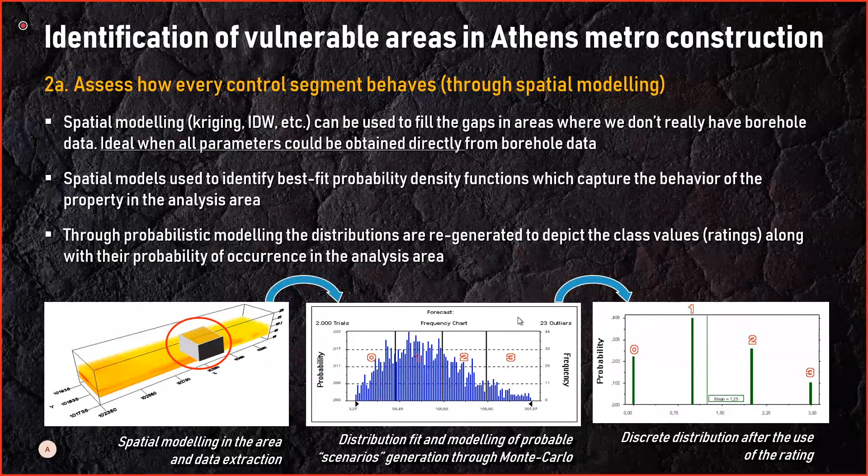In this manner, we can have all the spatial data constructed into ratings that help us make the whole assessment. But of course, we don't only have this type of analysis. We have this type of analysis in areas where we have a lot of data to gather and process - RQD, MR, the overburden, the hydraulic head, as you saw.

Of course, we have some other data that are not so abundant, so it is not a wise thing to treat it as spatial analysis, because it is not adequate enough for the analysis to be extremely helpful - it would be an erroneous analysis. So what we need to do is correlate this data with some geological units.

So in doing that, we first perform the spatial modeling of the geological units and then interlinked their properties to them. The first spatial modeling was made using an indicator kriging type, using 1 if we had this geological unit present, 0 if we didn't, and then we multiplied the probability of having the geological unit along with the actual property of this continuum.

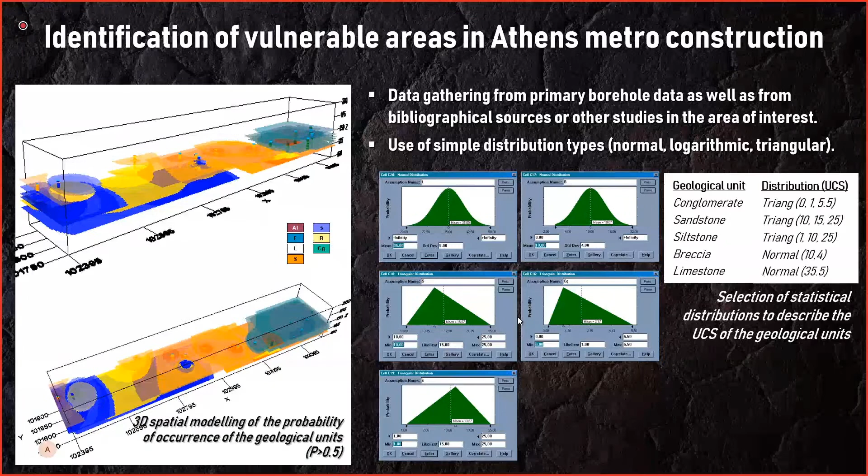To this end, a weighting of these parameters could be most appropriate in order to have a unique value that can characterize the vulnerability. In our case, we have used the rock engineering system principles as given by Hudson, where the interactivity of the parameters is the indicator of the importance of the system, and so this method has been selected.

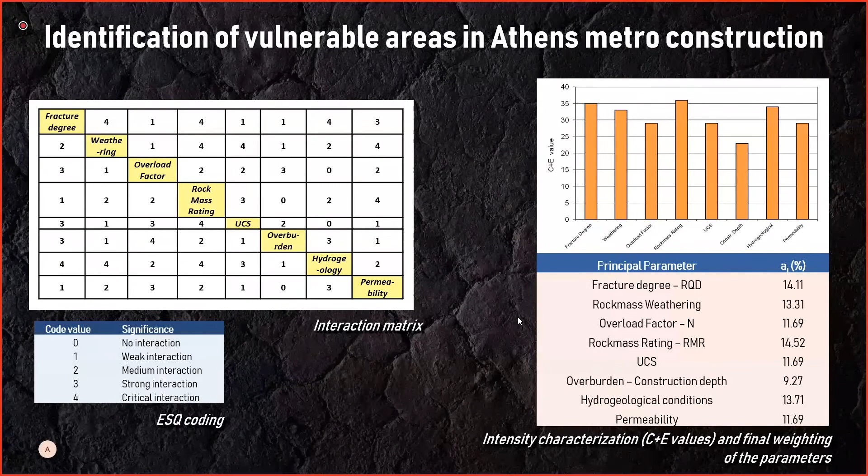Of course, someone else could use some other multi-criteria analysis, such as the analytic hierarchy process, to prioritize the parameters. Here you can see the matrix that was developed and the ESQ empirical semi-quantitative rating that was applied to come up with the results given in the table. You can see that 4 are the more dominant parameters: the fracturing degree, weathering, rock mass rating, and hydrogeological conditions.

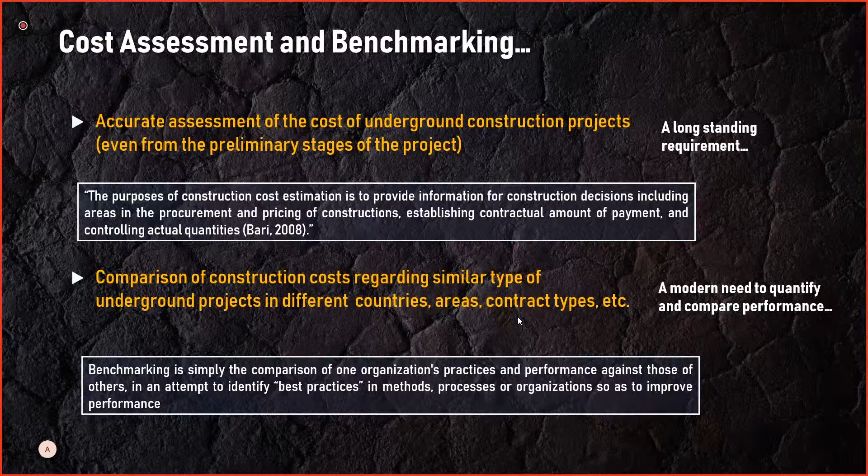Worldwide research conducted among tunnel stakeholders, constructors, and designers concluded that the main cost driver, of course, it's not something we didn't know, are the encountered geological conditions, followed by the applied construction type, thus meeting the requirement of these conditions by designing compatible methods of excavation and support, as Hoek proposed, can influence our ability to control cost.

Let's move to the breakdown of the tunnel construction cost and identify what are its main components. These are the 2 notable researches I'm going to show you. The first is from Greece, covering almost 100 kilometers of tunnels constructing the Egnatia Highway, and it is shown that approximately 62% of the cost relates to the excavation and temporary support.

The second comes from Efron and Read, that covers a wide variety of tunnel cases worldwide, and in there, the excavation cost ranges from 60 to 70% of the total construction costs. These two researches coincide, and thus we can deduce that the excavation support is the major component of the cost, almost 70% of the total.

In order to have a cost assessment of the Greek tunnels, we need to always have accurate and reliable data. This is an important requirement.

And of course, we have at our disposal cost data coming mainly from the as-built reports. What we aimed to do was to get insights regarding the construction costs and to try to correlate and link it with the encountered geotechnical conditions.

The methodology that was used is based on the principles of case-based reasoning, and this method uses past experience or knowledge gained in order to make assumptions or propose choices to be applied to new situations of future projects.

In this manner, we have analyzed the tunnel projects thoroughly in an attempt to extract cost data coming from each type of design, cross-section that correspond to certain geotechnical conditions. And in doing so, we have found some linkage and cost range estimations between them and the GSI of the encountered conditions.

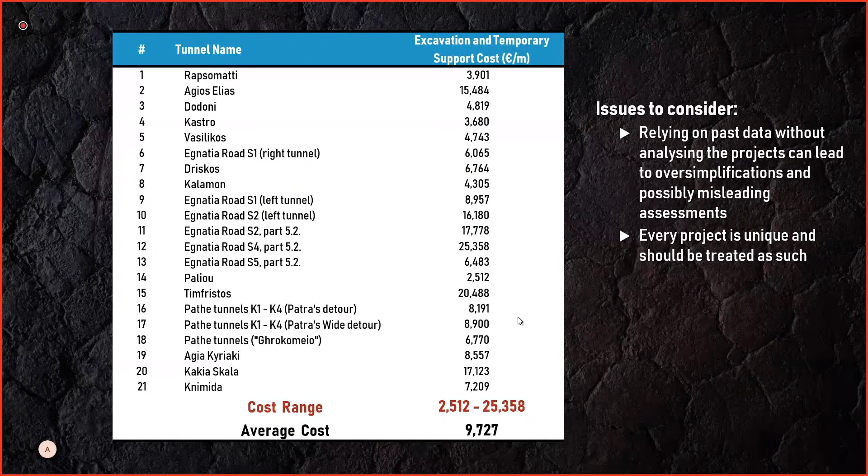It's from 2,500 to 25,000 euros per meter. So it's something that we can't just use without any caution.

We need to be really meticulous with the handling of the data. We need to register all the excavations and support measures adopted, all the resources, and recalculate all the cost using the unit pricing method and the required materials and resources.

Here are the results obtained from the data. You can see on the table some 5 rock mass classes used in the analysis, from A to E. A is the best, E is the worst, and of course the median cost per cubic meter that each of these categories had. In the chart, you can see these categories along with more details such as min and max values, lower and upper quartile values, and the median as shown in the table.

As you can see, moving from good geotechnical conditions to really challenging ones, the cost also escalates. Category A has very little data, resulting in less variance in its figures. The greatest variance is experienced in category C, where we have a median value of 90 euros per cubic meter, and almost 50% of all cost values lie within a range between 60 and 120 euros.

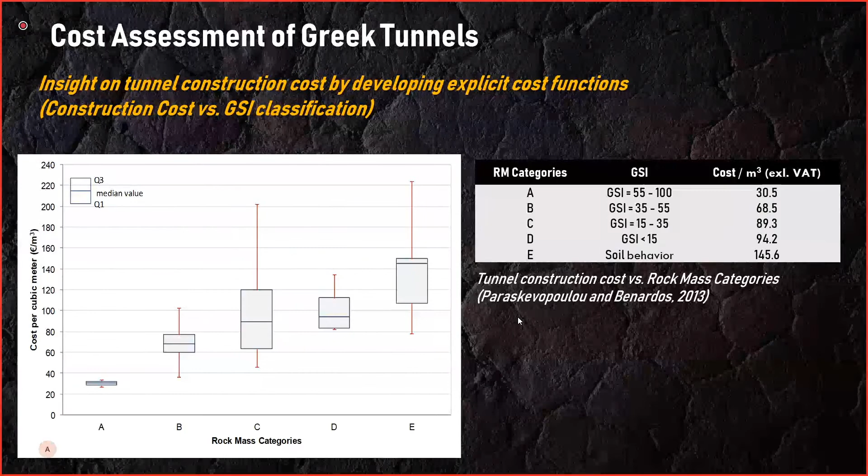In any case, these figures show a strong relation between cost and the conditions encountered, and can be used as a first-order assessment of the expected cost of the tunnel project, if we can really identify correctly the encountered conditions on the construction site. Let's look more closely.

Category C is the category with the most variance, and we have data coming from an application length of approximately 4 kilometers, coming from 7 tunnels. If we focus on the cost per cubic meter, we can see the variations firsthand, and this might be explained by the extreme sensitivity of the construction to the geological conditions, or even to the different approaches that the designers employ to bypass this poor rock mass.

It might also indicate that perhaps our GSI class from 15 to 35 is just too wide, and it needs some refinement to actually capture the trends.

Here are some correlations between GSI and the cost, either in terms of cost per cubic meter of tunnel or cost per meter of tunnel constructed, which can also be used as a quick assessment tool. Here are some other correlations we had between GSI and cost per meter of tunnel, also incorporating the span of the tunnel in the analysis.

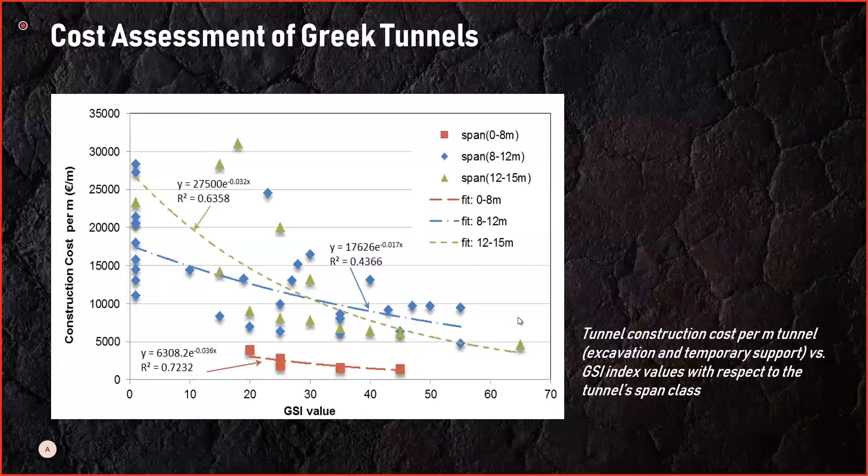So, leaving all this, I must move to the benchmarking, and there are some slides on that. We were inspired to do this benchmarking after reading an old report from HM Treasury that wanted to evaluate the construction cost of tunnels in the UK as related to those of continental Europe.